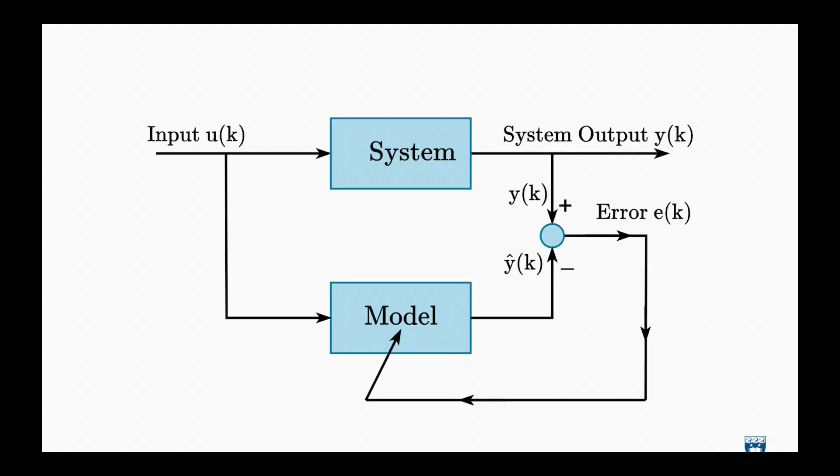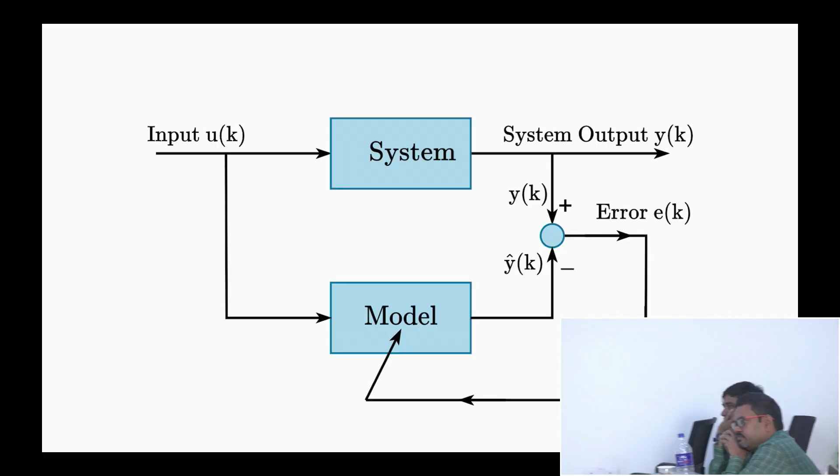Okay, see, first let me go to this slide, and then we'll see. In the modeling, what you do, I will come back to that point. I have got a system, and I have to fit a model. So I will apply the same input to the system, same input to the model. So I will get an error, then I will use this error to update the model, right? Very standard system identification, right? Things are not that easy.

And I am telling you, in this lecture and coming lectures, I will tell certain controversial things, okay, which many people think is wrong, and we think is right, 100% right. And we have got the authority to tell that thing, because we have published papers on that, and we have worked with big sources in the world. We will say, and the people have to follow. There is no other way out. We'll see that, right?

This diagram looks very simple. I want to mimic the system behavior. The model has to mimic the system behavior. You apply the same input to the system, same input to the model, you get the error and update the model. This is the standard thing. Which model?

Models are many. Let me give an example. You see, I am here. I have got many models. First model: I am the son of my father. Second model: I am the father of my son. Third model: I am the teacher of my student. Fourth model.

So many different types of models. Which model you should use? Extremely difficult decision. Which model will you use?

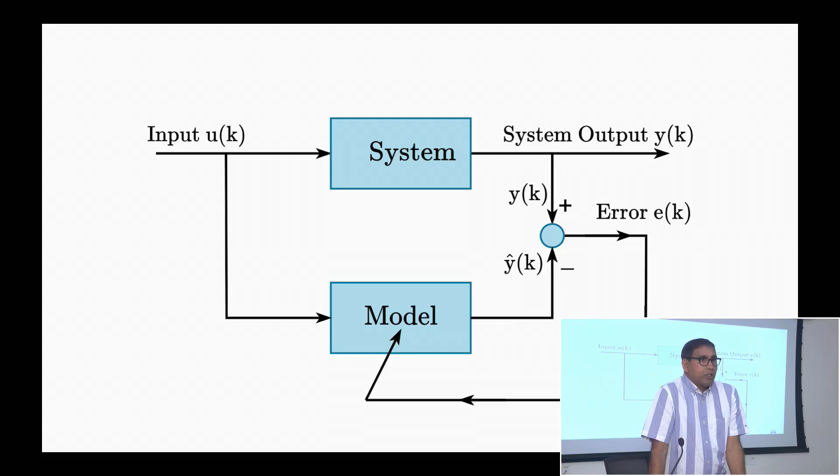If you are getting one job, you go and join. In a campus, if a student is intelligent, he gets multiple offers—one from Google, another from Microsoft, another from Accenture. Then he is problematic. Which one will he take? Got the point? So models are many. Which model will you use?

Various types of models you see here. There are many types: parametric models, non-parametric, continuous, discrete, lumped, distributed, deterministic, stochastic, linear. Oh dear, too many choices.

A man with one watch is sure what time it is. A man with multiple choices is not sure. Which type of model is to be fitted to the data? Which factors will determine which model to fit? That is a difficult decision.

There are different types of models we'll discuss today, and we'll also see why you are going to fit the model.

As I told you yesterday, it is not an intellectual form, it is not intellectual gymnastics. Because the Ministry of Energy, Ministry of Human Resources is giving some money, and a course is conducted by two professors from your own department, and a person coming from outside—Government of India is giving money. It's not a bloody form.

What's the point? What's the goal? Why are you doing it? As a student told me, 'Dr. Swain, I want to fit a model.' Why the hell will you fit a model? 'No, I don't know.' You don't know why to fit the model? Then go away.

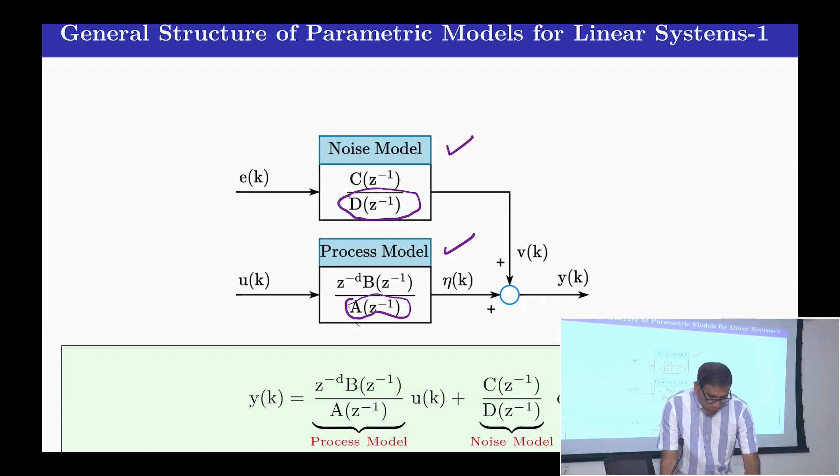The structure of the model here: the usual structure is this D polynomial, the noise polynomial. The noise denominator is D, the process denominator is A. Just check it here. That is the whole difference we will make later on. Another thing is the A polynomial structure: the first term is 1, and this is called a monic polynomial. Don't enter into so many mathematical terms.

And in the B polynomial, the first term is not 1. The first term is B0. Remember, those points are important. By definition, for the A polynomial, C polynomial, or D polynomial, the first term is 1. For the B polynomial, the first term is not 1; it is some constant, B0. This is the structure. We'll talk about those structures shortly.

Now, there are different types of models. One model is the autoregressive model. That's a general structure, but not necessarily. I will explain only these three terms now carefully. Autoregressive model: yk is equal to 1 over A(z^-1) times ek, or yk is equal to minus a1 yk-1, yk-2, up to yk-na.

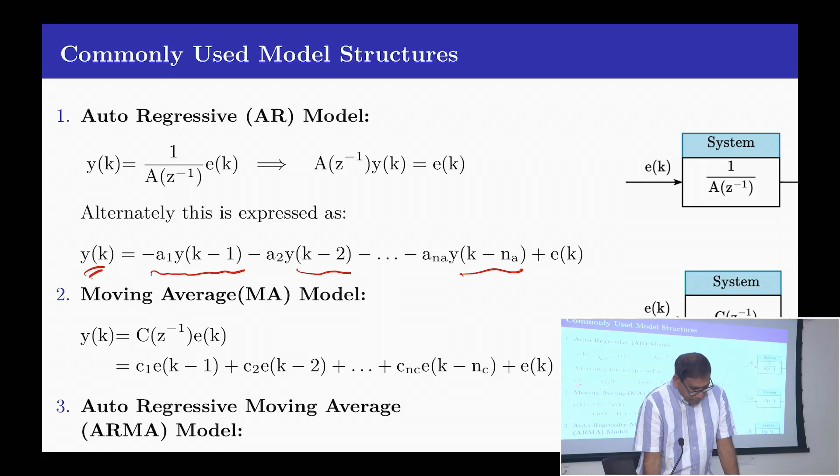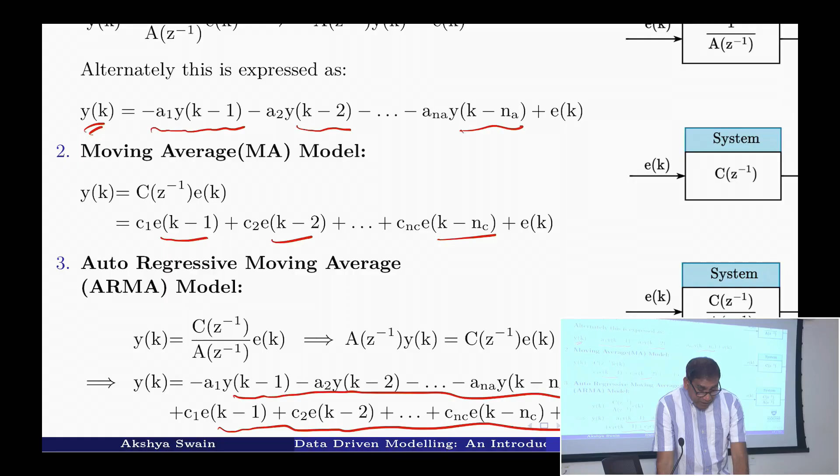Second type of model is a moving average model. You see the structure, where the output is not a regression of itself. It is a regression of some noise sequence: ek minus 1, ek minus 2, ek minus 3. That is moving average of the noise, because you are moving in the regression pattern. Then the auto-regressive moving average model has an auto-regressive part and a moving average part: the ARMA model. So auto-regressive model, moving average model, ARMA model, different types of models.

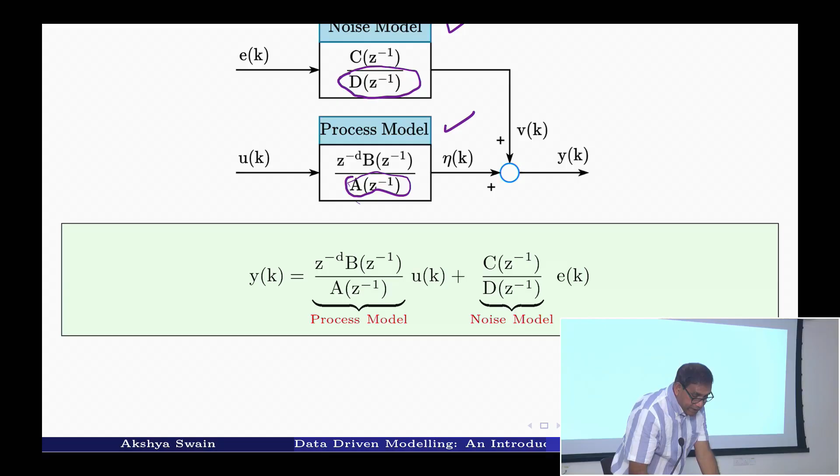ARX model. This model is important. Here you see, this is the standard transfer function model. Be careful. You see the generalized structure of the noise model, C by D. If you compare with the diagram here, the noise model is C by D, but in the ARX model, C by D is 1 by A. This A and this A are the same. See the difference.

And this model is the standard transfer function model. Yk is yk minus 1, the auto-regressive part, plus the input part. This is output and this is input. But it is called ARX model. You will do it today in the tutorial, a very simple one-line command. The X term comes from statistics: extra input, exogenous input, auto-regressive with extra input. In the ARX model structure, you will find this A is there, not a D.

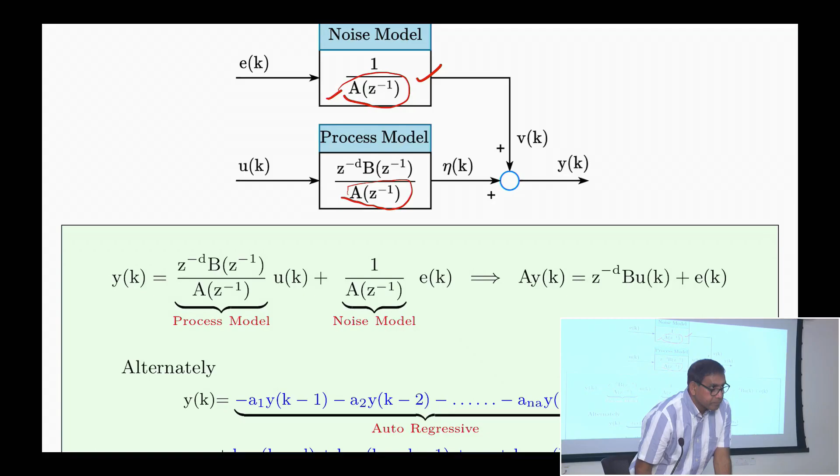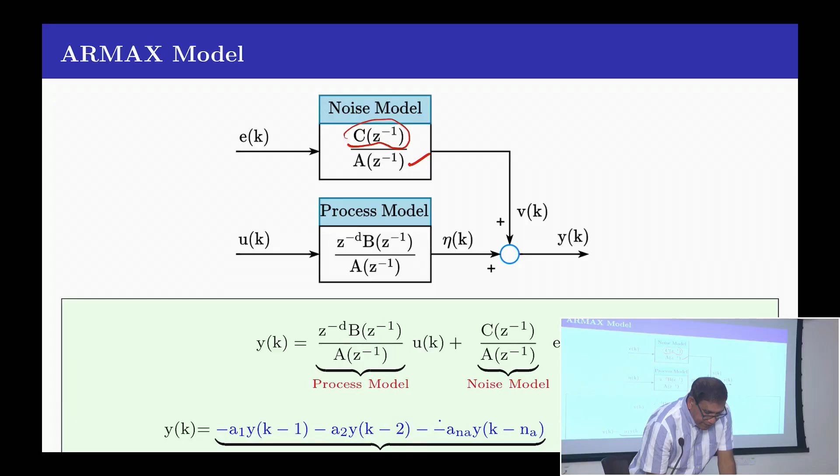Another model is the ARMAX model. Here you see that the C term is there, but this A term and that A term are the same. Process model or ARMAX model.

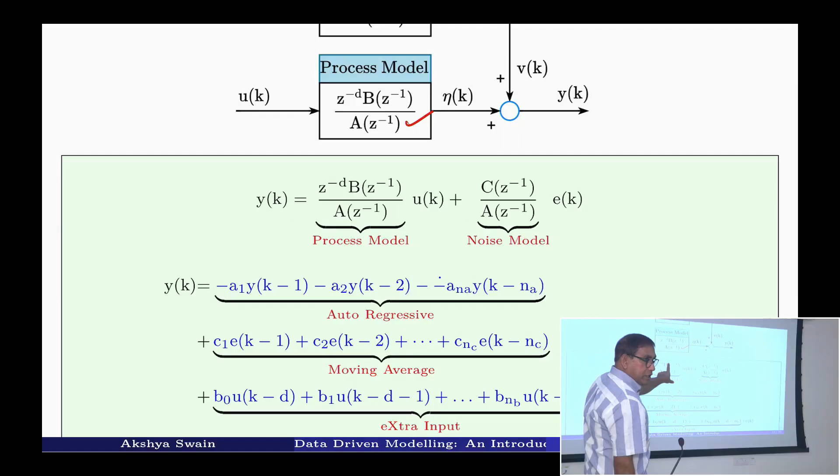So mainly, this point I am telling because, not in the next lecture but subsequently, maybe tomorrow, the output of the system is described by a discrete parametric model: z to the power minus d, d is some constant, the delay, B by A uk, just like a transfer function, plus C by A ek. It has got two parts, the process part and the noise part. This is the model we will use in designing the adaptive controller.

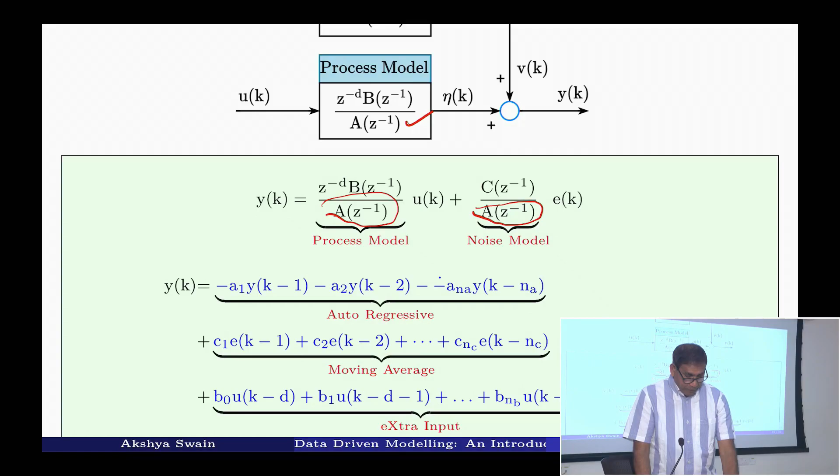And another important point, remember, the denominator of the process model and the denominator of the noise model are the same. This A here and this A, they are the same, they are not different. This is the ARMAX model. This model will be used to design the adaptive control, which I will discuss tomorrow. But today we have got so many things to discuss.

All these models which I discussed can be described by this form. How it is described, I will explain now. Say yk is equal to z to the power minus 1 (b0 plus b1 z to the power minus 1) by (1 plus a1 z to the power minus 1 plus a2 z to the power minus 2). This will be represented as yk is equal to minus a1 yk minus 1 minus a2 yk minus 2 plus b0 uk minus 1 plus b1 uk minus 2.

This model can be represented in a general structure. We will start this from the next lecture. yk is equal to theta 1 p1k, where this is a function of k only, plus theta 2 p2k plus theta 3 p3k plus theta 4 p4k. If this model is represented like this, that means p1k is equal to yk minus 1, p2k is equal to yk minus 2, theta 1 is equal to minus a1, theta 2 is equal to minus a2. Do you understand these things?

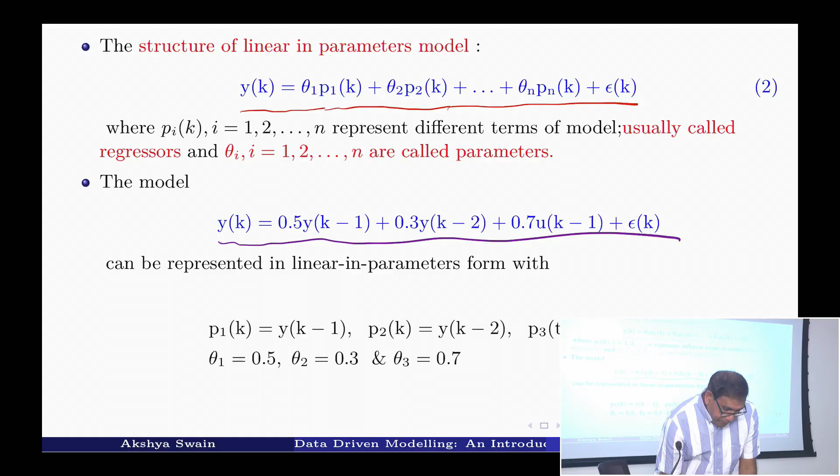The same system, please keep in mind, can be represented in the form yk is equal to theta 1 p1 plus theta 2 p2 plus theta 3 p3 plus theta 4 p4, where, if I map it, p1k is yk minus 1, p2k is yk minus 2, p3k is uk minus 1, and p4k is uk minus 2. So all these models which we discussed have a speciality: they are linear in parameters. Let us discuss this a little more, with examples.

Professor, just remember that we are going to put objective questions for the people. It comes to my mind that we will put this type of questions.

yk is equal to theta 1 yk minus 1 plus theta 2 uk minus 1. I'm taking five, six examples now. Is this model linear or nonlinear? Linear. You understand parameters and signals: force is equal to mass into acceleration; force and acceleration are signals, mass is the parameter. Voltage is equal to resistance into current; voltage and current are signals, resistance is a parameter. So yk minus 1 and uk minus 1 are signals, theta 1 and theta 2 are the parameters.

This system is linear. Is it linear in parameters or nonlinear in parameters? Theta 1 and theta 2 are linear, so it is linear in parameters; LIP I am writing here in short. Second example: yk is equal to theta 1 yk minus 1 plus theta 1 theta 2 yk minus 2 plus theta 3 uk minus 1 plus theta 3 into theta 4 uk minus 2.

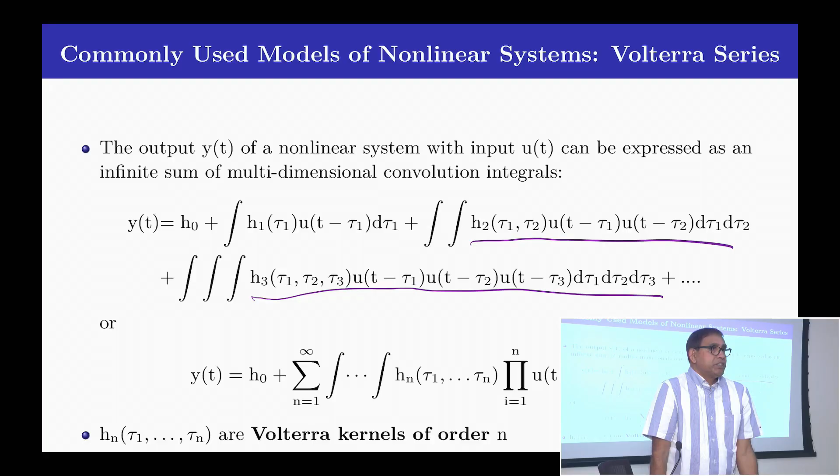Volterra series. This is for linear system. If you want to represent nonlinear systems, there are so many different ways. One is the standard Volterra series. The Volterra series is an extension of the standard linear impulse response function: h1 of tau times u of t minus tau for a linear system, then you use higher order kernels. I am not telling that you should know these things; it is a bit complex. But the Volterra series is linear in parameters, and it is being extensively used for nonlinear system identification.

And there are many other types of system models which are used for representing nonlinear systems: Hammerstein model, Wiener model, sandwich model. But I want to tell you one thing here. Very few groups in the entire world are working on this modeling, just countable numbers. One group is in the University of Sheffield, where we were working with Steve Billings and his group, and subsequently we bifurcated to many places.

The Hammerstein model and Wiener model are being extensively used in biomedical signal processing, but by very few people. When I was in Canada, I was visiting a person called David Westwick. David Westwick uses it. If you say Hammerstein-Wiener model, people say, go to David Westwick, he will tell. Nobody else. Hardly; you can just count how many people are working on this. Okay.

Kalman filter: if you have got data and you want to filter it, then you have the Kalman filter. But the question is, I'll tell you where the modeling comes in with a practical example. We had some biomedical data for renal blood flow, which we got from the Department of Physiology at the medical school. We wanted to fit a prediction model.

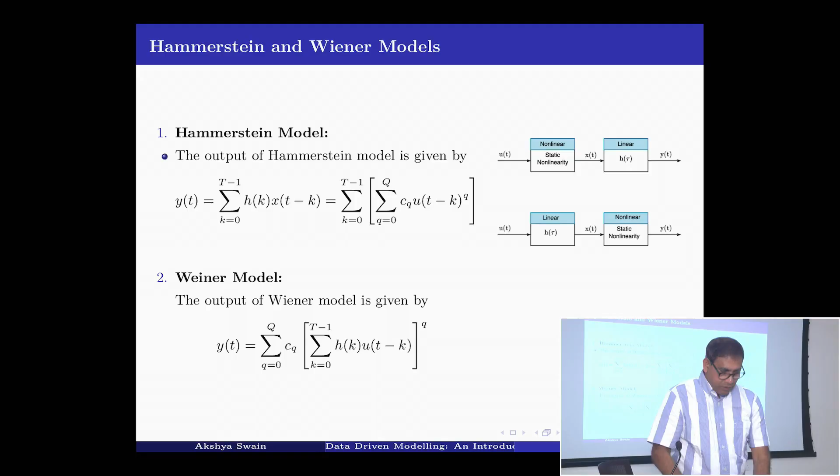So Hammerstein model, Wiener model, they are used for biomedical signal processing. And if you have got some doubt, ask David Westwick. David does it. I was working with him in Canada when I was there. And he works at the University of Calgary. Few people are working.

And we have got lots of ego problems actually. We were in a Singapore conference, one of my friends from Brazil, I'll just close it before we have a coffee break. Lennart Ljung is a big shot in Sweden, a big shot in system identification. Lennart Ljung was delivering the keynote speech. There were 500 people there in the Hyatt. There were some people sitting on the other side. Somehow they knew it. I've got another two people, one from Malaysia and one from Singapore. We are all working with Steve Billings. You will be surprised: Billings people, don't talk to them. Edward told me, hey, you know, those bloody people, don't talk to these people, they are Billings people, you see. So when you work with a very big source, when we give the theory and people follow it, then that's the problem.

Right? So I fully agree that the Kalman filter can do this, but Kalman filter is not a model. We'll see to that. So nonlinear systems, we will see, and we will have a coffee break. Only these three terms: the model should represent a wide class of systems. The model should be linear in parameters, because if it is nonlinear in parameters, you are in trouble. Okay. The parameters of the model should be interpretable, not like this neural network.